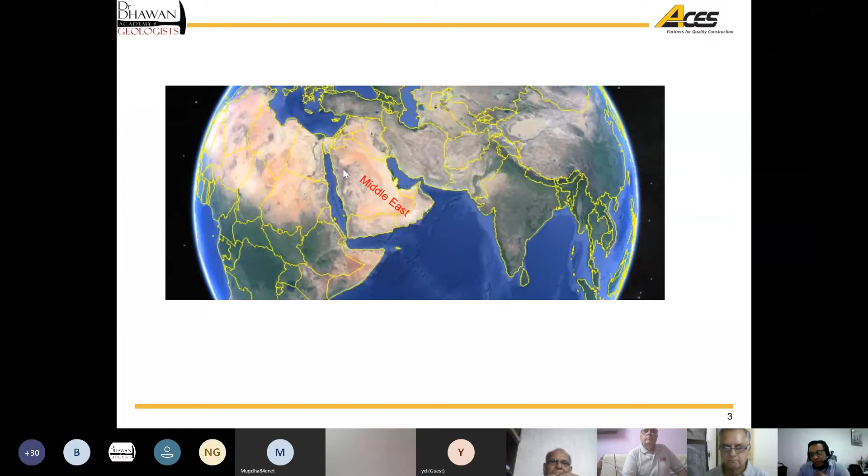So this is the Middle East part, this is our country India, and this is Emirates. In this part there are a lot of activities going on in present times, especially development of infrastructural facilities like roads, towers, buildings, ports, and airports. A huge activity is going on, especially in Saudi Arabia, with billions of dollars of projects going on now.

To have an overview of the geologic materials in the Middle East, which covers Saudi Arabia, Iran, Iraq, Syria, Kuwait, Bahrain, Qatar, United Arab Emirates, Oman, Yemen, and parts of Turkey: we have more dominantly unconsolidated materials, soils of the quaternary age. The rocks are deep-seated, below about 8 to 10 meters in this part of the world. Some exposures are there, like in the form of hills, hill ranges, and mountains. In general, in the plains, you get rocks at a depth of 2 to 3 meters to 10 or 11 meters, and above that you mostly get unconsolidated materials.

Underlying the unconsolidated materials, you get intermediate geomaterial, that is the weathered rocks, a highly destructured profile that is very distinct. At times, buildings or construction activity have to deal with this intermediate geomaterial, and for deep basement excavations you have to stabilize the cut slopes. As a mandatory requirement, all slopes generated more than 3 meters have to be properly analyzed before they get approval for construction. Below that, when we have deeper excavation of 10 to 12 meters, or in hill roads, any construction at the foot of hills, you get more than 8 to 10 meter cut slopes.

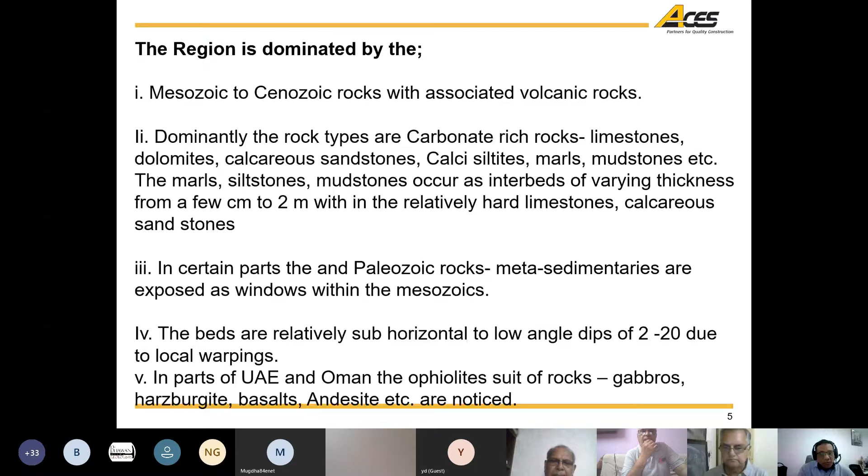So a whole range of rocks are there, but mostly for the slope stabilities, we get involved with the rocks like the limestones, the ophiolites, because they are in the hill ranges. For cutting or tunneling, you have to cross or cut across the mountains. So you have got at places very high slopes, cut slopes of 45 to 50 meters height for laying the infrastructure roads or tunnels in the tunnel portals.

The rocks are very jointed, highly jointed. In many places, more than 7 to 8 sets of joints you are getting. This poses extensive instability issues at times. If it's not properly studied and designed, the slopes, especially the slope angles vis-a-vis the protection measures, if they are not properly studied, they at times will land into problems.

This webinar presentation deals with the systematic approach followed in the study, effective design and construction of the cut slopes and estimation of cliffs in parts of the Middle East.

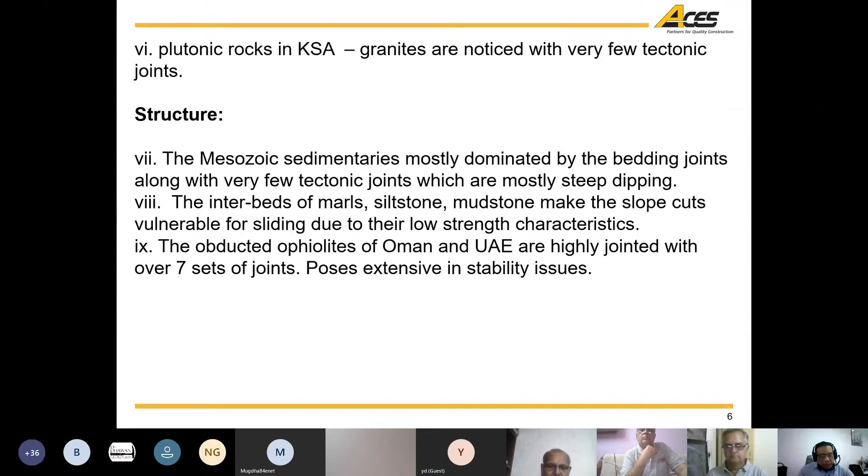In the Middle East, you have got very good number of deep or high cliffs, cliff faces where developments like construction of resorts, construction of hotels are contemplated or proposed or under construction. They mostly come to us to estimate the stability of these cliff faces, and what is the safe working line from the edge of the cliff for constructing the towers or hotels, any developmental activity for that matter, like roads also.

So we have to have a specific requirement here for the cliff faces. We've got a lot of cliffs here around the Middle East, like in UAE, Saudi Arabia, Oman. We have got good number of cliffs which are up to 700, 800 meter height, which are used as scenic spots, and they develop resorts on the top of these cliffs there.

We'll come to one case studies. The approach has to be very systematic, and if you are systematic in the approach, you are remarkably cost effective, and with high confidence on the long-term safety of the structures as well. So that's why a systematic study of the cut slopes or the cliffs is necessary before you embark on any detailed designs for the structures sitting over the cliffs or slopes, or the slopes by itself.

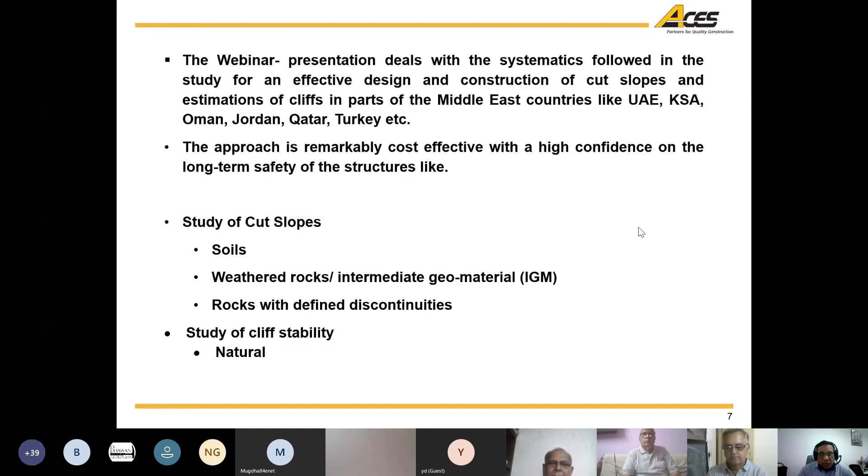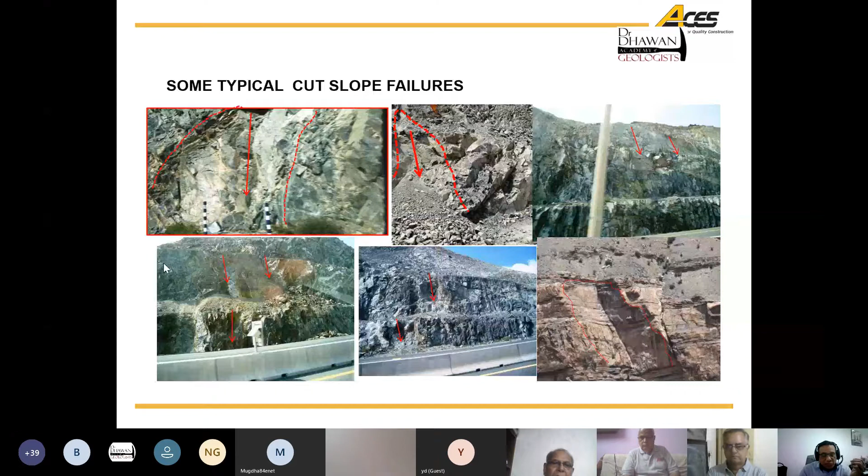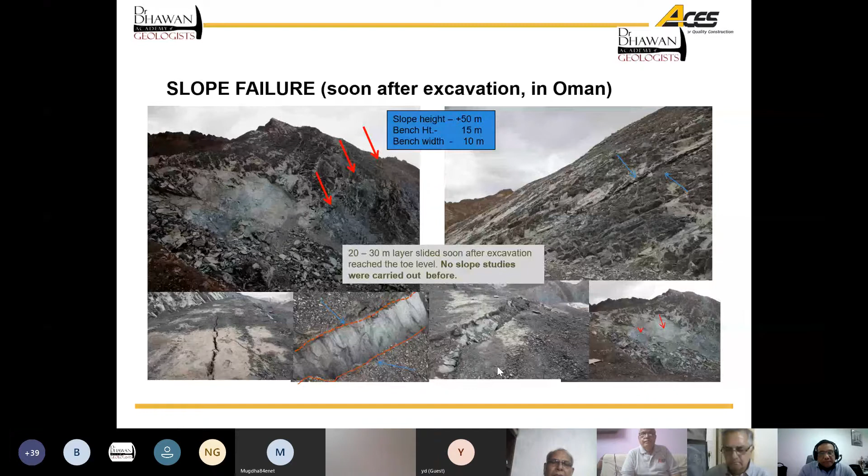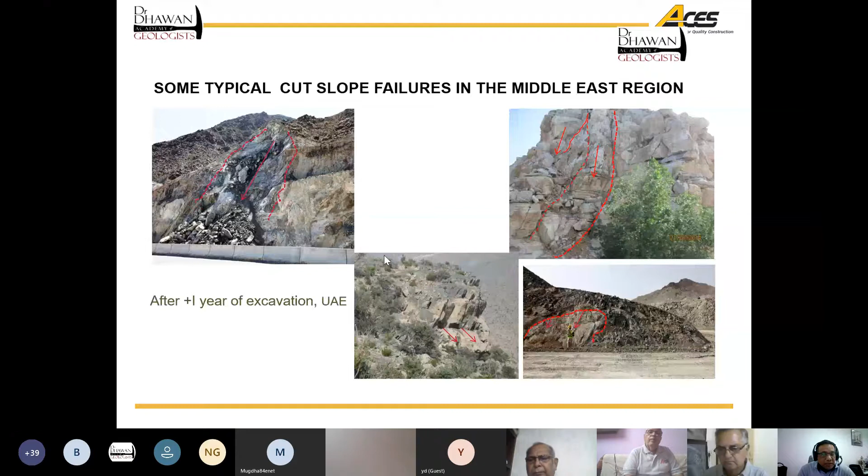These are some typical cut slope failures in the Middle East region. You see the natural cliffs falling with rock falls, and these are typical toppling failures which occurred soon after, within one year of excavation, because such failures happen if they are not properly studied. Here the bench has a concrete berm, but below the concrete everything has failed. You see this concrete slab is overhanging, this was a sealing on the bench, but it all failed. So for all practical purposes, this whole slope has failed in a way.

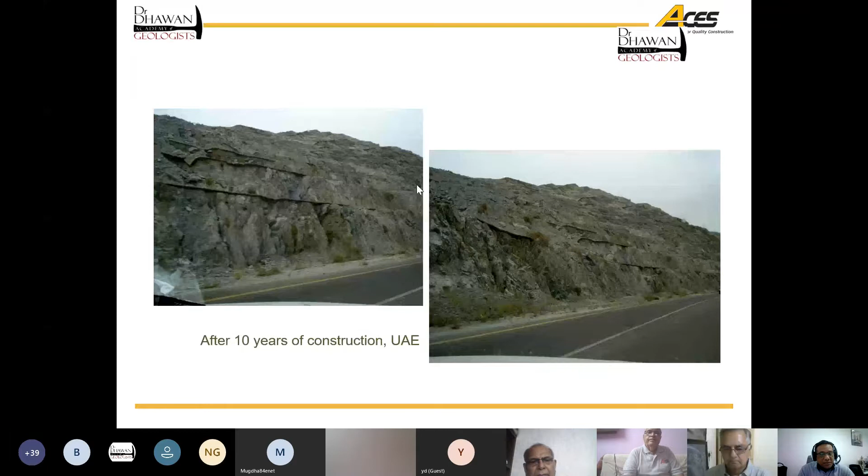So the engineered slopes mostly are the embankments, cut slopes, or retaining walls. Embankments are mostly in cohesionless soils, so we have to, in the weathered rocks, have a proper assessment of the material and design a proper slope angle for the excavations. This is very common in most projects, in the fields or in the weathered profiles or in the topsoils, where the slopes are anything more than 3 meters.

That's why it is a mandatory requirement from the authorities to approve the designs. Whatever excavations exceed 3 meters, it's mandatory to have a slope stability analysis. So every project with more than 3 meters of excavation has to be assessed properly, and the slopes, whether temporary or permanent, have to be designed properly. That requires a mandatory study for these cut slopes.

So the factors contributing to slope failures are mainly the composition, structure, secondary or inherited structures like faults or the joint system, then the stratification and the angle of stratification. All these are contributing factors for the stability of cut slopes. So we have to identify all these structural aspects within the rock material or rock formations, and we have to go for a stability analysis.

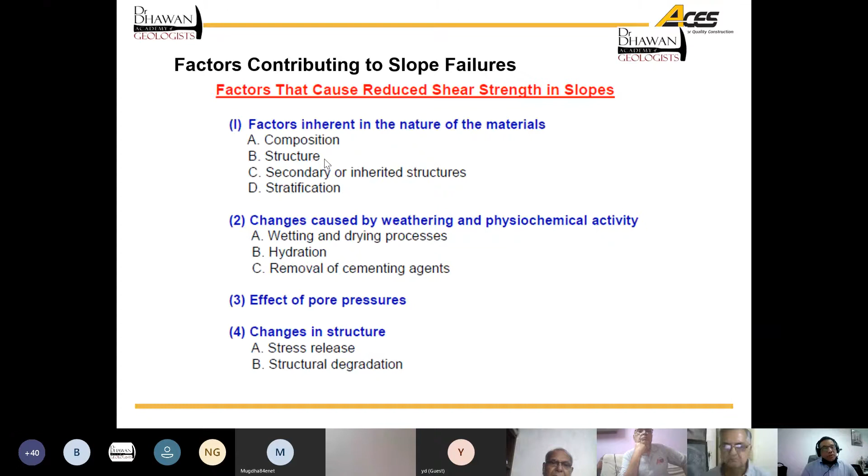These are the different parameters we assess, like the effect of pore pressure, dynamic stress conditions, the inherent structure of the material, and their rock mechanic properties. So we approach rock cut slope analysis within the rocks, and follow different techniques. We'll give you just an overview of that.

It involves systematic data acquisition from the field using the latest field techniques, like engineering geological mapping. We use satellite imageries or aerial photographs at times when the area is large, like for cliff studies where it is more than 5 or 10 kilometers in cliff length. We use high resolution satellite imagery to identify any major structures passing through, especially.

Then we do walkover surveys with engineering geological mapping and collect basic data like the joint system, different joint sets, bedding data, and azimuthal data of the structures. Then for the cliff faces, we adopt terrestrial photography for the cliff faces or cut slopes for a final estimation of the slopes with potential blocks, assessing the potential nature of the slopes, identifying and isolating zones, and providing site-specific treatment based on the terrestrial photo mosaics we develop.

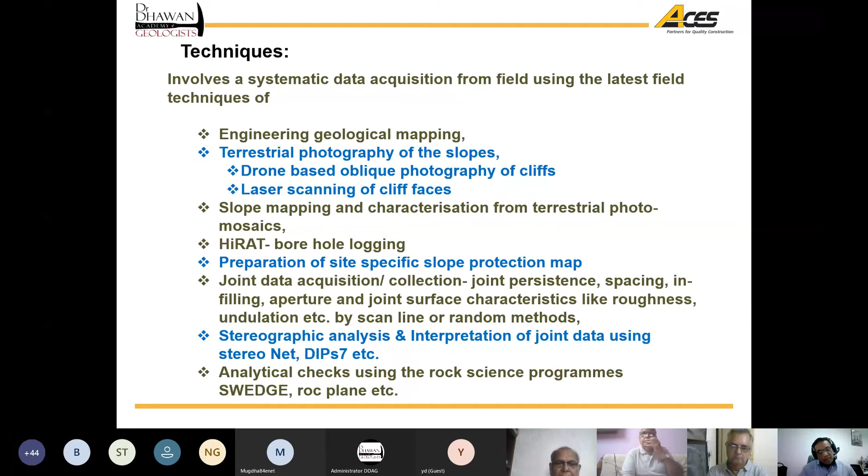Then based on the findings from the stereo analysis, we go for an analytical check using the rock science programs like Swedge, Rockplane, and we have Rockfall also to identify the site-specific problems.

The various equipment we use for slope stability studies are GPS, geologic compass, of course, high-resolution SLR cameras, selective for terrestrial photography, laser scanners, drone-mounted cameras, drilling equipment with accessories, HIRAT equipment for photography, borehole photography, and then comb profilograph, joint roughness measurement, Schmidt hammer for joint strength, tapes for linear measurements, and all that.

Then in the laboratory, we go in for testing, direct shear box tests to determine the shear strength parameters along the joints, along with fillings and without fillings, with asperities. Considering all that, we determine the shear strength parameters like C and phi along the joint for the stability analysis.

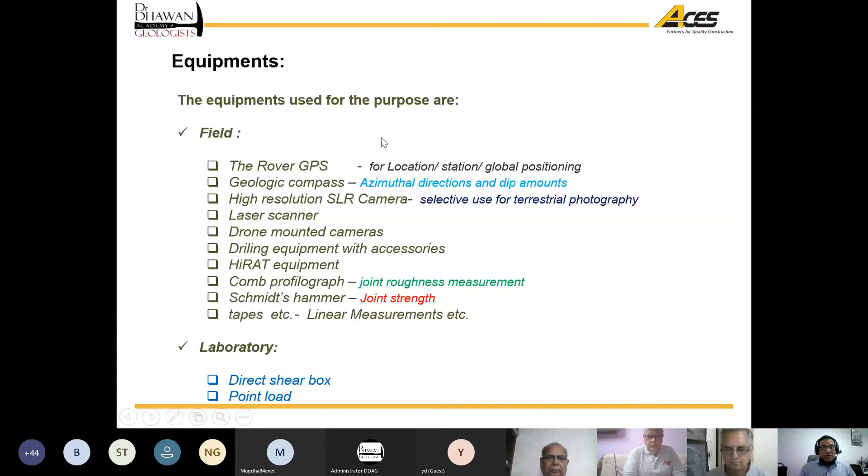Then we carry out point load tests for the strength, estimation of strength parameters, and density we estimate. Then the whole analysis revolves around the factor of safety which you have and what you have to achieve.

So there are two methods we use for factor of safety: the ASD method, that is allowable stress design method, and the other is load resistance factor design, LRFD method. In this ASD, mostly we check for a factor of safety of 1.5 in static condition and up to 1.1 in dynamic or earthquake condition.

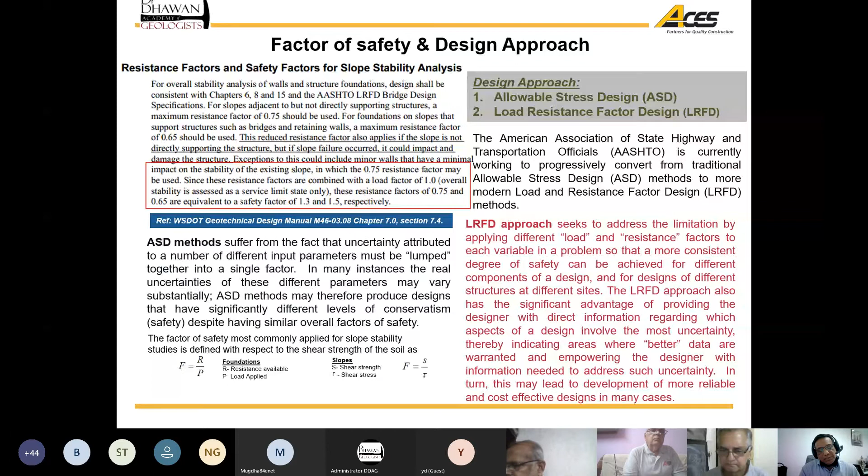The parameters for stability check and analysis, the various properties of rocks and joint sets which need to be determined or studied and used in the analysis, are the rock mass properties like density and strength, rock slope azimuthal directions, and the rock structure, discontinuity, and joint set characteristics. These are the different parameters we collect from the site as well as from the lab tests.

And we take the joint set characteristics like persistence, spacing, aperture, opening, filling. This gives you an idea of the block size which is formed or likely to be formed, and we can estimate, if it falls, what will be the size of the block and what will be its weight. All this you estimate from the analysis based on these parameters collected from the site.

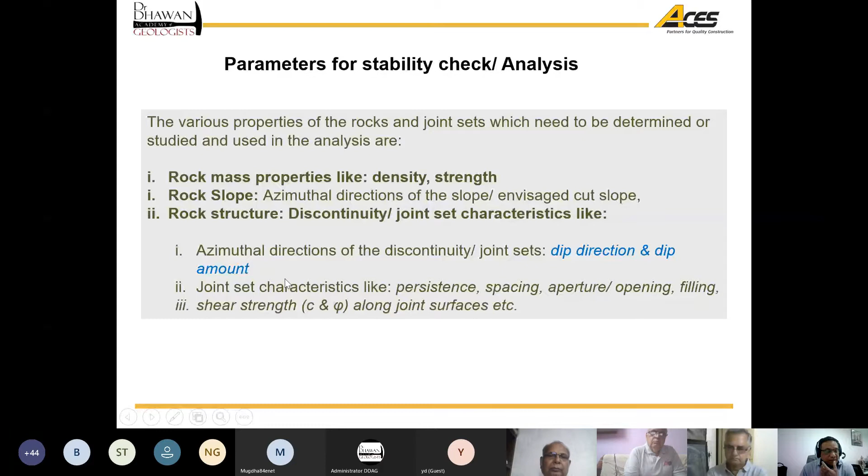So this is engineering geological mapping we normally carry out. This is just an overview. We use rover GPS here, we use compass, and we physically measure the data on that. Then the different data we collect during the course of this mapping include joint spacing, persistence, aperture, filling, roughness.

Joint compressive strength, of course, we get it from the lab, or we do Schmidt's hammer. Using Schmidt's hammer, we get the direct strength from the field.

Besides that, we measure the rock quality designation RQD, we estimate joint volume, then weathering grade, we note observation. For rock mass, we use the engineering classification of weathering grades to classify or describe the weathering of the rock mass.

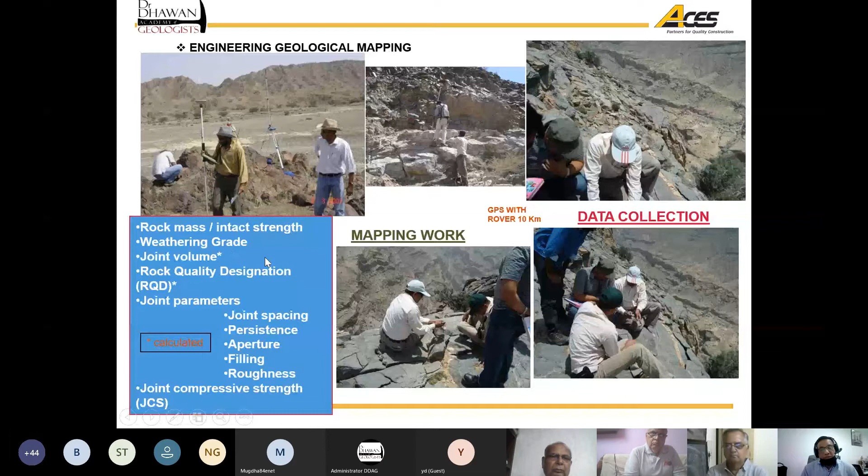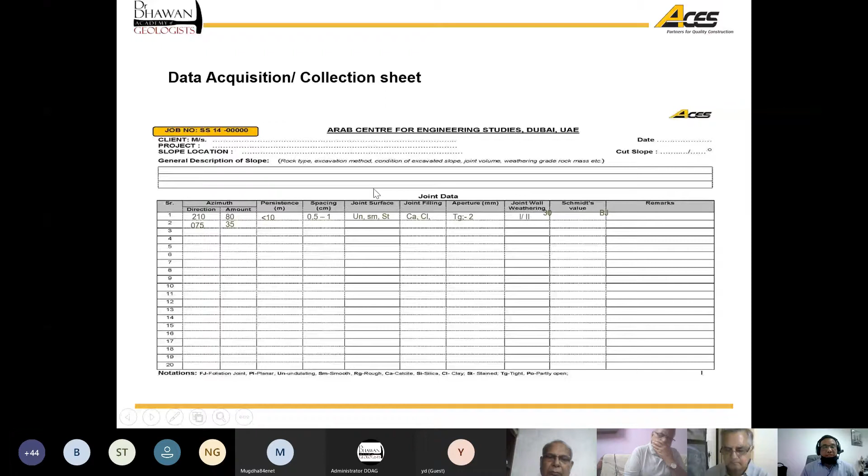Then we do the specialized laboratory testing. From the core, we select the joints and prepare the blocks. Then we take photographs, we measure the asperities and the directions. Then we mount it on the mold here.

This is the direct shear machine, and we shear it and determine the C and phi. Then we take photographs of the sheared surfaces after failure, for recording and reporting purposes.

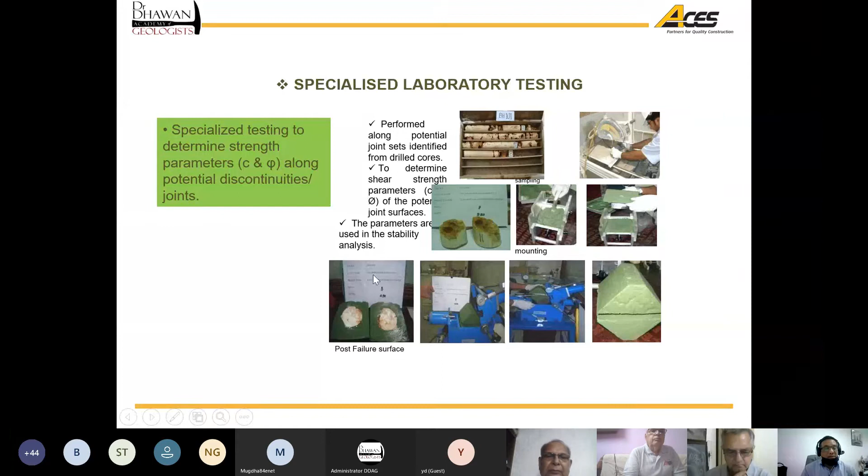For rock mass rating, we use SMR, RMR, GSI. These are different standard classifications we use for describing or characterizing the rock masses. For slopes, normally we use RMR and SMR to characterize and describe them.

I'm not going into the details of each classification. I have little time on that.

Just the personnel and software which we use. The personnel involved in such studies include a highly experienced engineering geologist, civil geotechnical engineers, geophysicists we use at times to determine the HiRAT. Normally the geophysicist handles it. Then a material engineer for lab testing, then a geologist for the field mapping.

Then we have a surveyor for using and handling the GPS. Then we have technicians for testing. Specialist software which we use includes AutoCAD, StereoNet, DIPS, RockPlane, SWedge, photo managers for processing the terrestrial photographs, and then we use RocFall. We also use Flac3D for 3D analysis.

So this is just an overview of rock slope mapping with terrestrial photomosaic. This is the principle - what is the base distance ratio? Based on that, we fix the overlap and take the photographs. This is the standard chart we use based on the focal length.

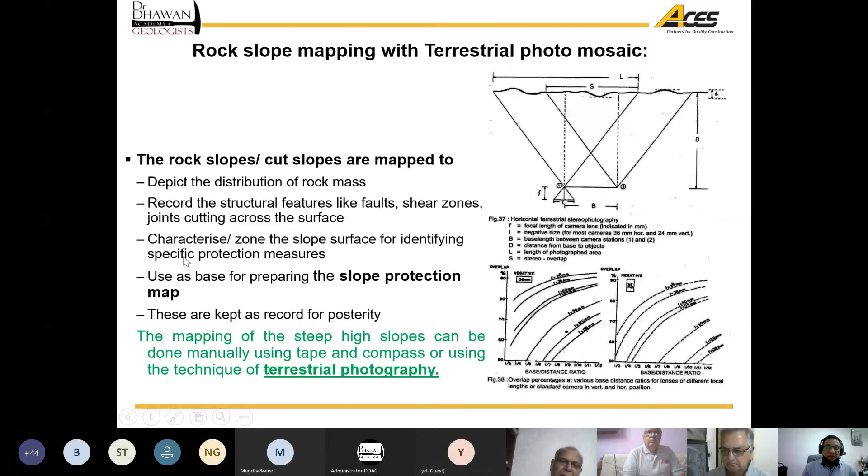People were proposing, contemplating at that time to use helicopters to map this cliff face. However, we came in, this was in 2004-5, and we undertook this job. We had to trek a lot, climbing up about 1 kilometer, almost 900 meters up, and at a distance of about 2 kilometers we took these photographs and could determine the features.

On the stability of this cliff, with any overhangs or any potential wedges or anything of that sort, we can identify from these photographs. In this particular project, after 2004, they came again in 2019 for a review of the cliff faces. We took repeat terrestrial photography and compared the previous and the present - a lot of rock falls, because it's a retreating cliff, were identified.

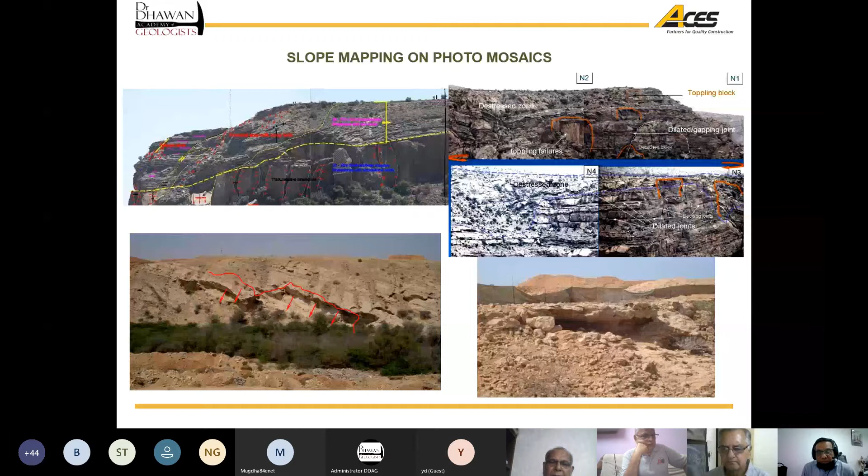So this is some precision drilling we do at times for the HiRAT study, as well as to study the joint surface data. We measure the varying dips and the asperities, undulations at depth. Suppose our depth of excavation is more than 50 meters or 40 meters - beforehand, you can find out the type of structure, the nature of structures, or the properties of the joint surfaces, all beforehand for a proper design.

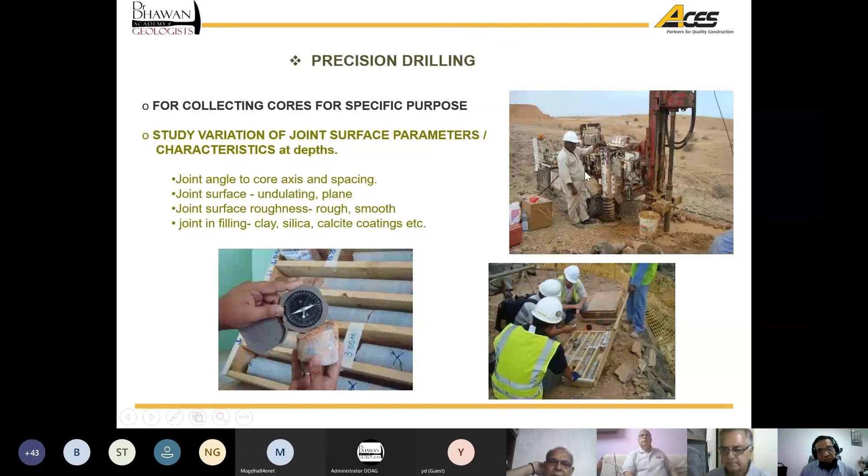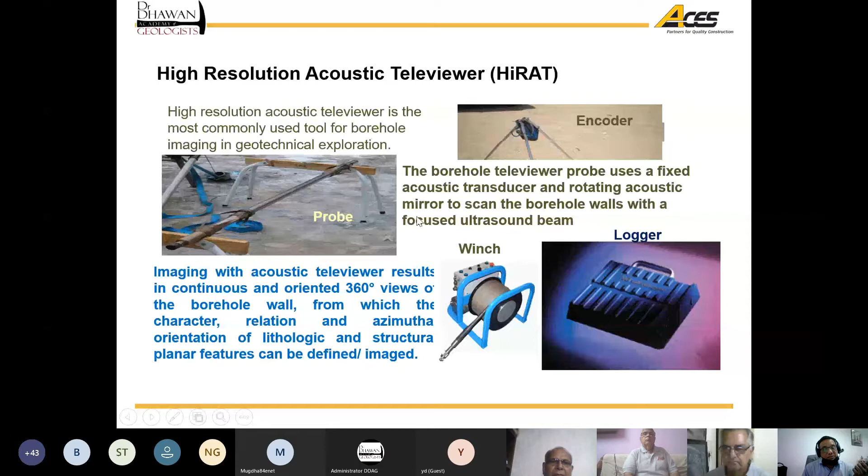So this is the higher resolution acoustic televiewer we use in the boreholes to determine or estimate the joint system. These are the HiRAT equipment features, and this is the analysis and interpretation we do. We get the polar diagrams, we get the rosettes. Then for this box particularly we have the recoveries, and you do the HiRAT output showing these different joints.

We compare it with the actual recoveries of cores and the joints just for confirmation.

You can use this data - like you got shear seams at a depth of say 12 meters, 15 meters, and another shear seam at this depth. These are the beddings - if it's horizontal, we get the beddings or bedding shears also at times. So you can identify the weak features at depth before you go into excavation, and estimate the potential nature of these seams and weak features with respect to the cut slopes.

And there is specialized laboratory testing we have done.

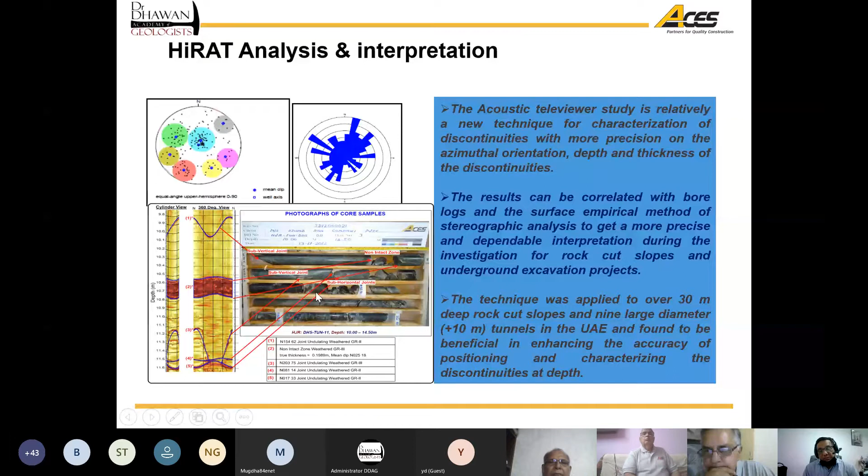Then we come to data analysis - the empirical method and analytical method follow. The empirical method is stereo plotting or kinematic admissibility checks, by which we identify the failure modes - wedges, planar failures, or toppling failures. We identify the specific wedges for which analytical checks are to be carried out, and we identify the azimuthal directions of the different joint sets contributing to instability from this empirical method.

Am I okay? Continuing okay? Hello? Yes sir, yes sir. Yeah, just cross check.

Now come to the analytical methods. As I said, in the empirical method we identify the different failure modes using the joint system, stereo plotting, or kinematic admissibility checks, using Rocscience softwares.

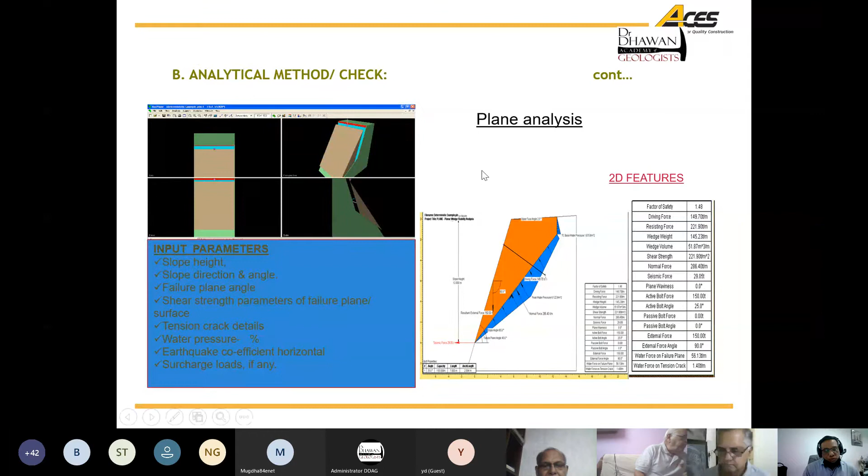So these are the analyses we do. We also do sensitivity analysis at times for critical or large projects, to see which parameter is more sensitive to stability and factor of safety - like cohesion, angle of internal friction, unit weight, or seismic coefficient condition. Accordingly, the support measures are designed, stressing more on the support according to the support designs.

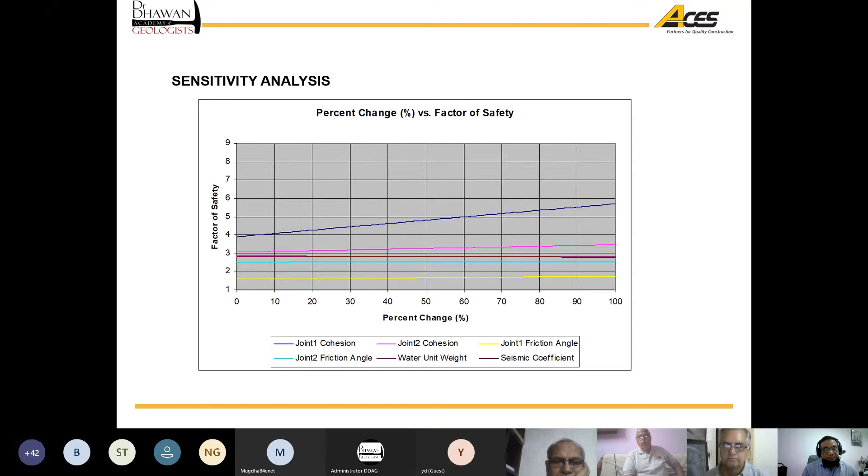So with this, we check for each block - wedge block or planar block - and then design or recommend the support measure required. We identified this site specifically on the protection map.

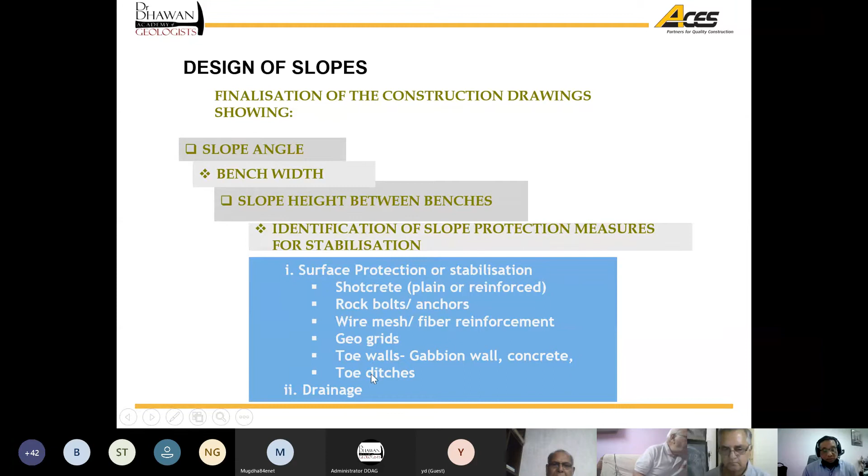Then the solution measures involve slope angle, bench width, slope height between benches - finalizing the construction drawings showing these parameters, and identification of slope protection measures for stabilization based on the analysis, like shotcrete, rock bolt, wire mesh, geogrids, toe walls, gabions, concrete toe walls, toe ditches, and drainage.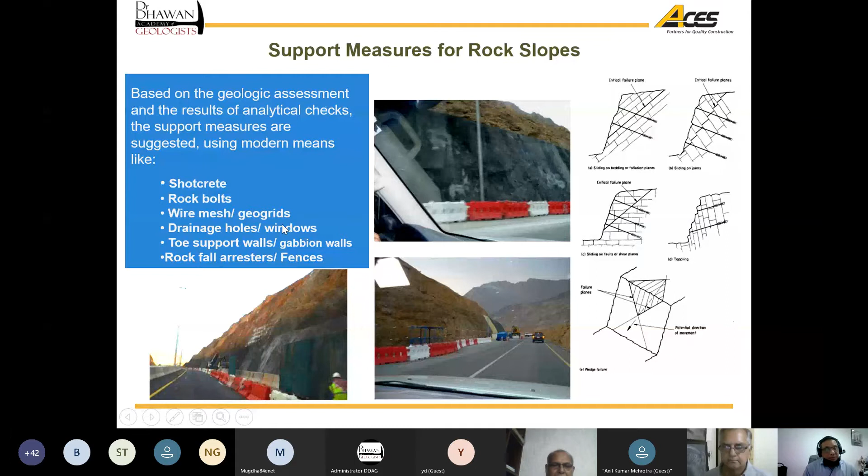Thanks. So these are some typical manually prepared slope protection maps. Then we do characterization or zoning, like high strength rock, high strength medium spaced, highly weathered, or slightly weathered.

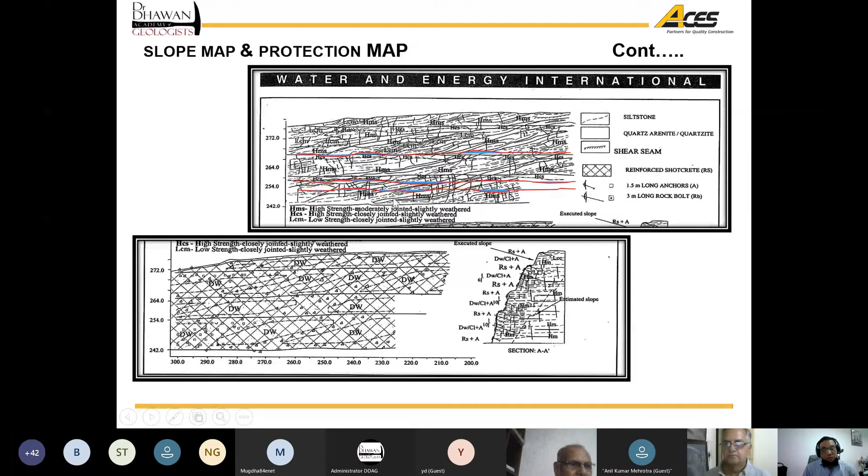We identify and categorize the slopes, and based on this we give protection measures - like only shotcrete, with bolts or without bolts, or only shotcrete with mesh reinforcement or without mesh reinforcement. At times we handle with the slope angle as well.

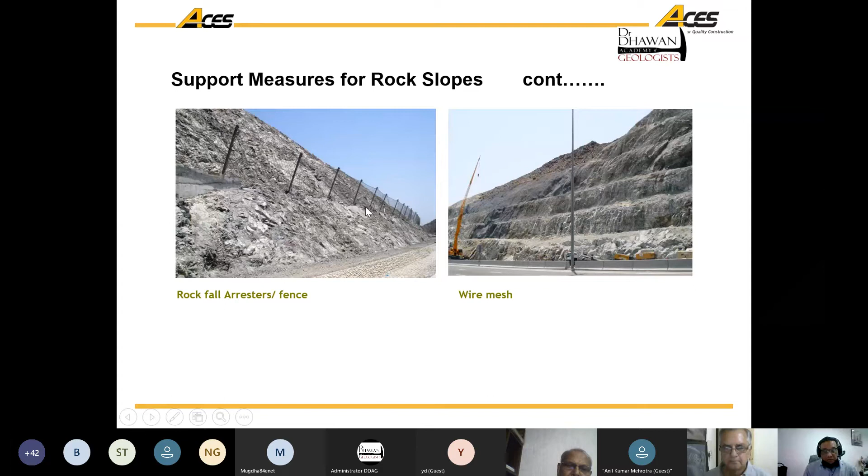And we give rockfall protection fences like this also, depending on site specific studies. These are site specific - the whole slope is mapped, and based on that we recommended only shotcrete on this part, with some rock bolts identified at potential blocks.

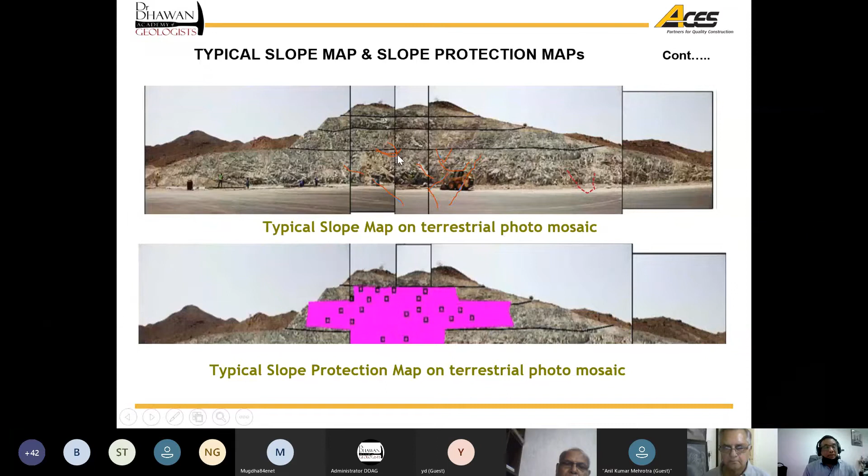We had to check the stability of this cut slope with the loadings of the water as well as the building loads. So we did the usual geological mapping, then slope stability checks, and had to design the support measures as well.

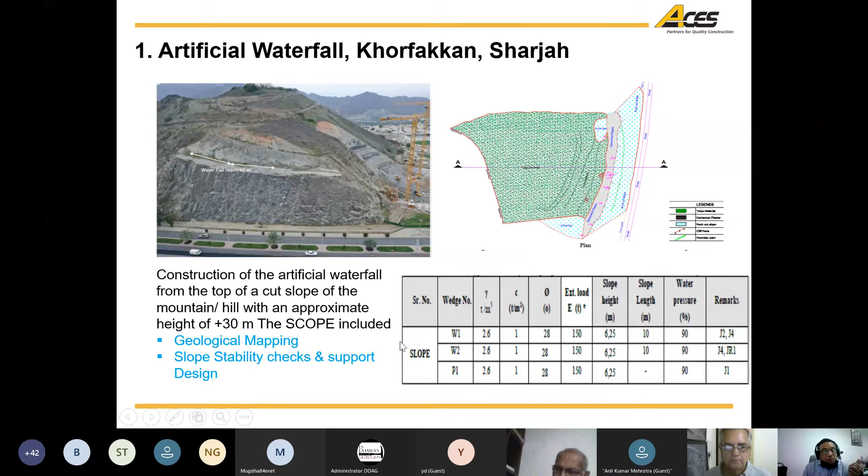Based on the geological mapping and lab tests, we identified a weak seam dipping at 32 degrees onto the slope, and we checked the stability of this block on the top, about 8 meters from the top of the slope.

So this block, the wedge block, they checked the stability with the loadings on the structure. We identified that it was not meeting the stability requirements. So we had to introduce a rock support system, rock bolts of 5 to 6 meter length with normal tensioning up to 30 tons, 30 to 35 tons. This is the identified summary table of rock bolts.

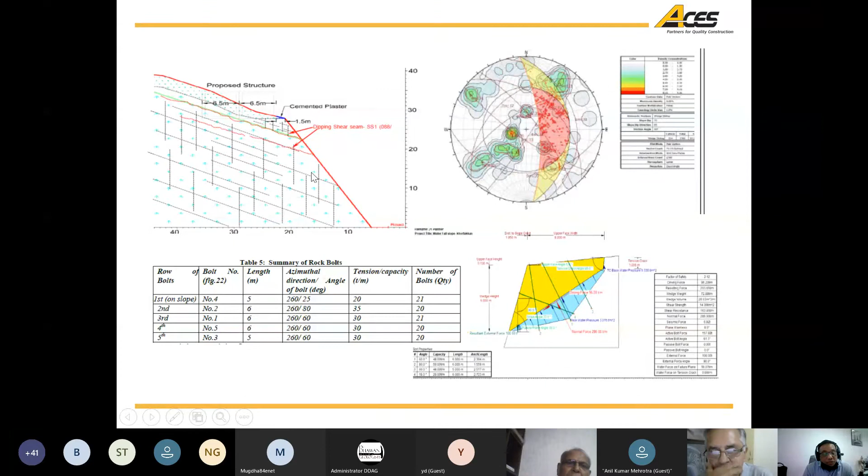This was executed at site, and the structure was constructed and is functional now. This is a restaurant here. The water is to be pumped from the top, creating a fall and going into a pool, and then from here the water falls onto the slope. This is the face where we had to do rock bolting from the face itself. We had to deploy big cranes to install these rock bolts, 5 to 6 meters length. From the top crest we installed these bolts from the top. Only one row we had here.

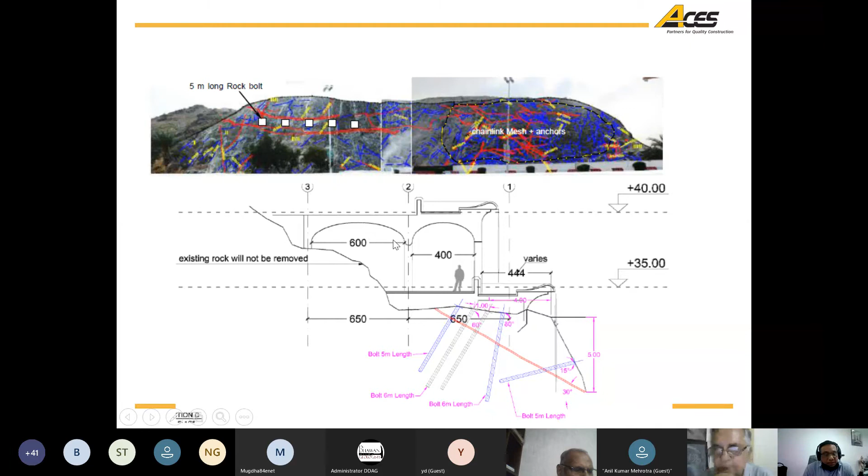This is the waterfall. In the night it looks like a scenic spot, very close to the sea beach, Khorfakkan beach in the Sharjah area. This was a very interesting project, we worked day and night. Now, over the last 6 months, this is functional.

Then we had the branded service apartment, Ava, in Saudi Arabia. We did one project where this is about a 60 meter high cliff cut. The slope was, this is during construction. Then we did the terrestrial photography, then identified the litho units and the structures. Based on that we designed the support system. This is the building, a hotel, a service apartment, branded hotel.

And the profile was something like this, a gently profile, hill profile. This was cut to this size, and the bench was created to construct the hotel. So this is the face log, or the photograph I have, and based on that we identified and characterized the rock masses, identified the litho units. This is the shear seam here.

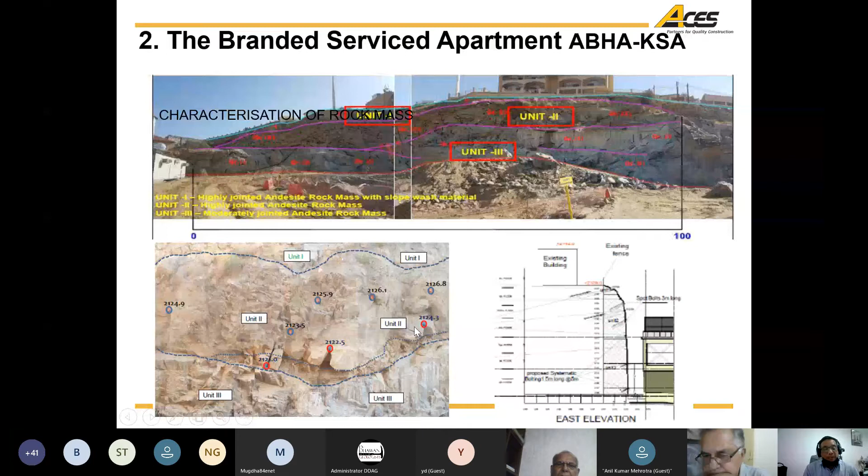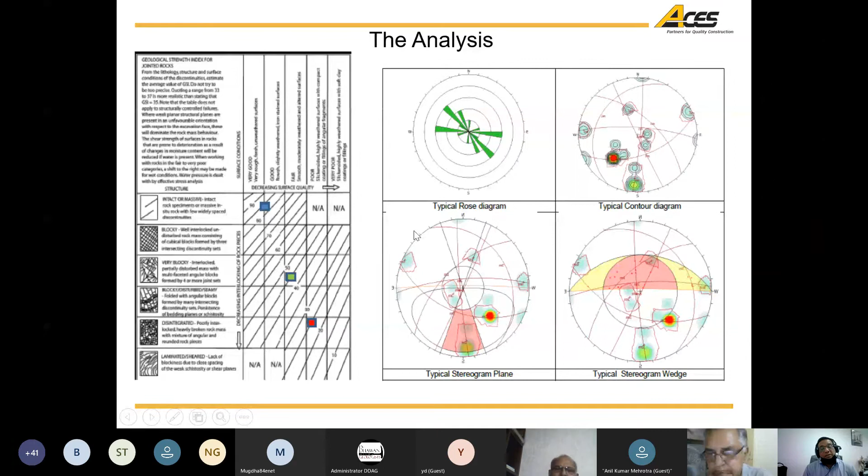We worked out a stability check for this and identified the support system. These are the different analyses we carried out - stereo plots, GSI estimations, and from that we found out the c-phi parameters. Then we did the stability analysis or stability checks, and identified the support requirement, considering the surcharge loads on the top.

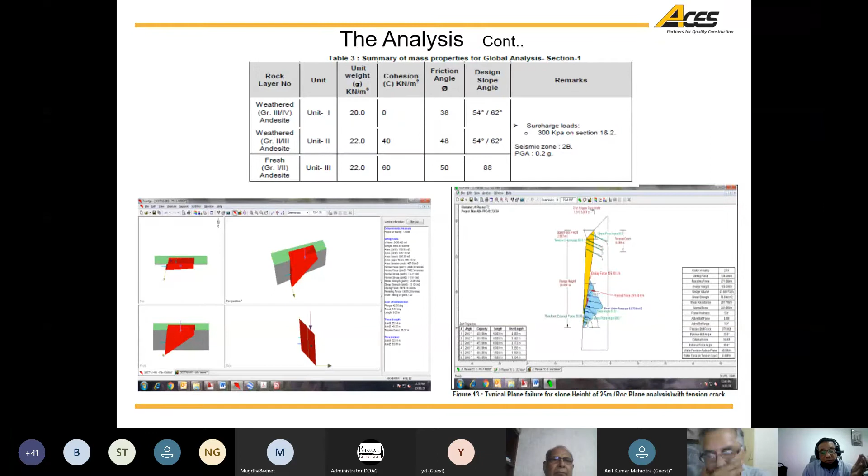So these are based on the study, the different recommendations given - rock bolts of different lengths at different elevations, because the gap between this building and the cut slope was very limited, only 4 to 5 meters. What happened - they did some estimations earlier, they put long bolts, that was done by us. Later the consultant went to another agency, and they carried out a review analysis and recommended 8 to 9 meter rock bolts throughout, from top to bottom.

By then the building was already constructed, so they had only 4 or 5 meters of space, and it was impossible to install 8 meter bolts in this region. So we did another review analysis later. We increased the tonnage capacities of the bolts, put larger diameter bolts here, and reduced the length of the bolts at the toe level, increasing the normal loading tension to achieve the factor of safety.

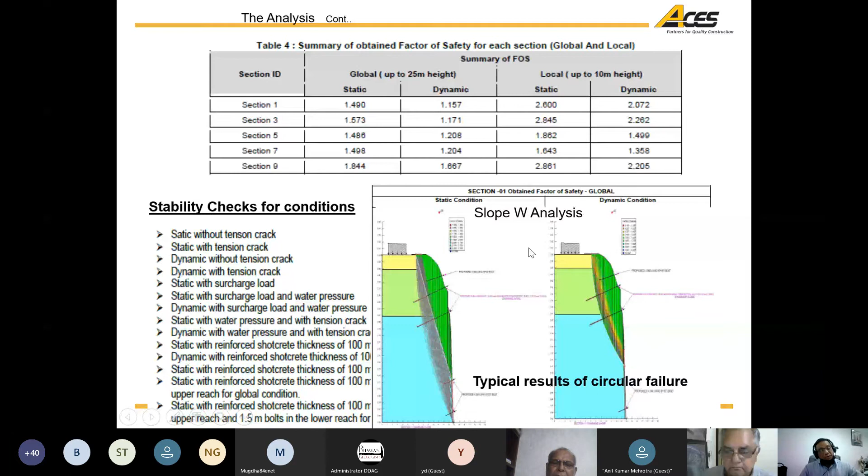We did the stability analysis for different conditions - static without tension crack, with tension crack, dynamic without tension crack. All these aspects were considered. For the different sections, this was about a 100 meter long slope, so we had about 9 sections evaluated for the stability check, and the support system was designed and is in position now. The hotel is completed, and so far so good, it's going on.

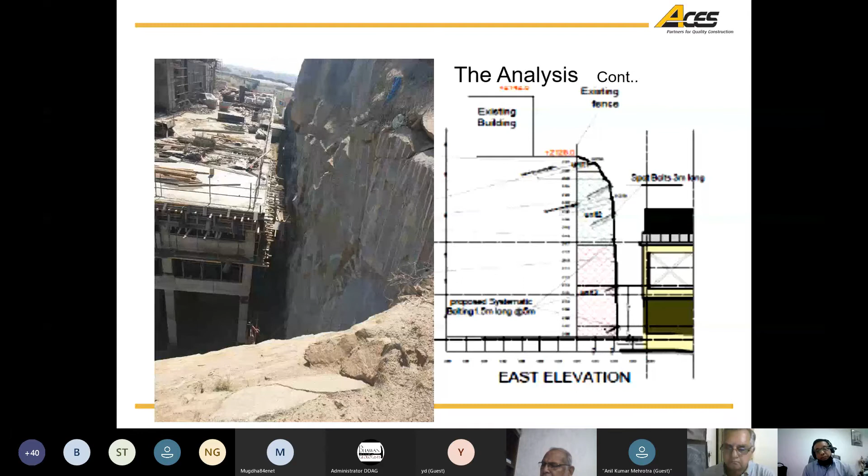The recommendations given are that we also mesh reinforcing existing systematic bolting. Then we changed and altered to 32 millimeter dia bolts. Earlier it was 26 mm only.

We also had to put some additional drainage boreholes here because there was a seam, which is potentially, of course, the dip of the seam was about 25 degrees. But with the normal loading, there was an existing building here already. Another building was coming here, has come here. For this, the whole slope was excavated to position this tower. So these are the different recommendations we give based on these studies.

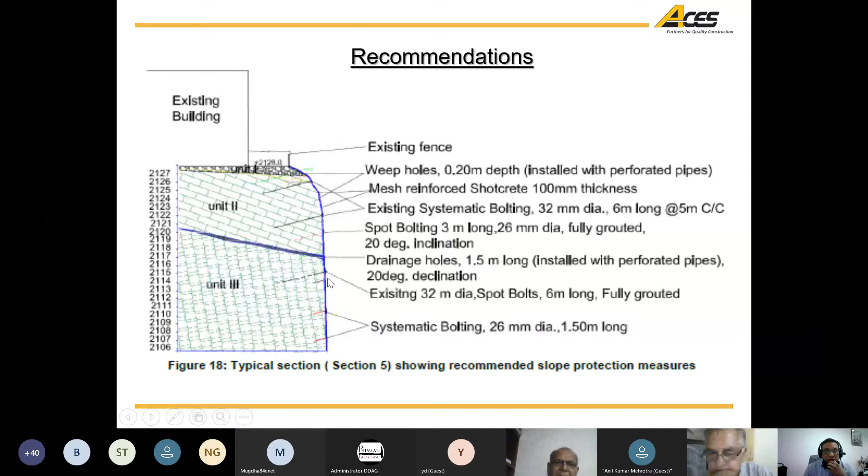Now we come to the cliffs, natural cliffs. We do geologic mapping, terrestrial photography, stability analysis. This cliff was about 800 meters high, in the Sultanate of Oman. Oman Tourism wanted to construct a resort hotel on top.

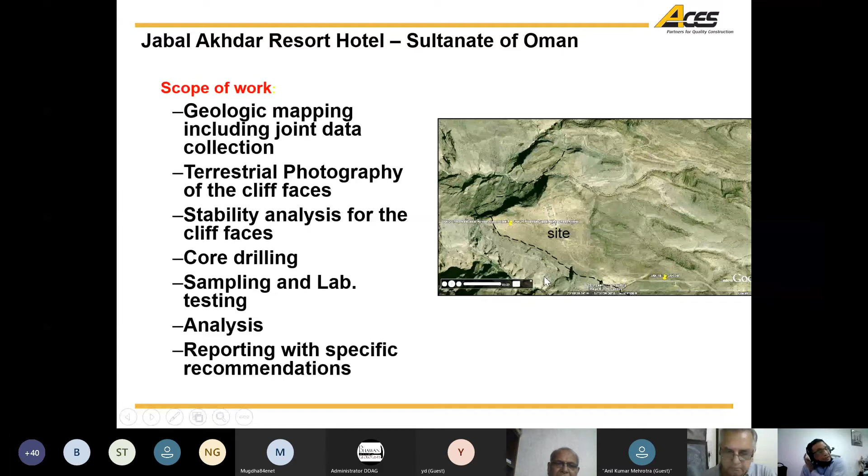This is the top, this is satellite imagery. All along this area, they have put resort hotels now. This study was carried out in 2004-05, and we had a review again in 2019. There were many rock falls here. So based on our previous study, we had given a safe working line, with different options provided. The methodology, as I told you, is very similar to the general study I described.

But the most interesting part was the terrestrial photography, carried out from a distance of 2 kilometers. That was very challenging, and we had to trek almost 900 meters on top, steep slopes. We went to the complementary top of the gorge section, and from the other side of the gorge we took the photograph, and it went very well.

This is the geological map of the top portion, and this is the cliff distress, highly distressed zone. Mostly these are limestones, and though it is subhorizontally bedded, the joints are distressed. The edges are very much distressed at the cliff face, and we had a lot of distressed rock mass all along this cliff.

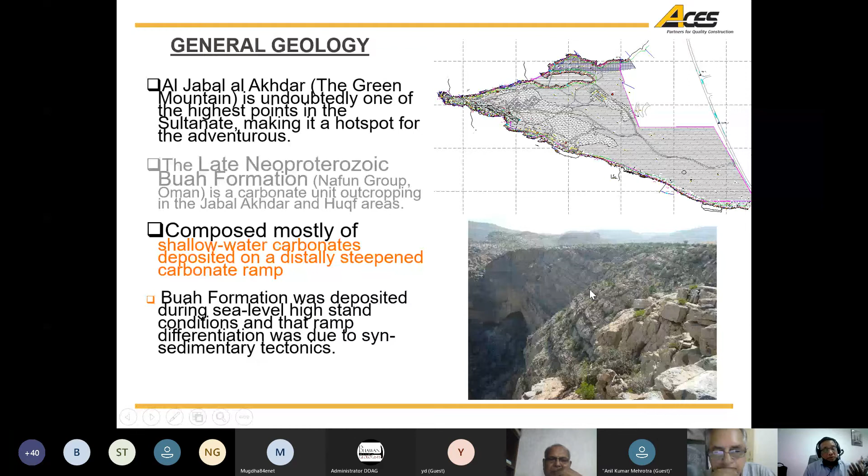Then we did the mapping, drilling, acoustic televiewer, and trenching, collecting all data for geological mapping, and then we did terrestrial photography. As I told you, this is the cliff section, the gorge section. From here we went to the complementary top on this side, and took photographs from those two points. This is the north slope and this is the south slope. This is how we did it.

This photography was really interesting, very challenging, because we had to convince a lot of people in the authorities as well as the consultants. So it took a lot of time, but we completed the job very successfully, and they were quite okay with this. These are the photographs taken from around 2 kilometer distance with high resolution cameras.

Ahmed sir, can we rush through now?

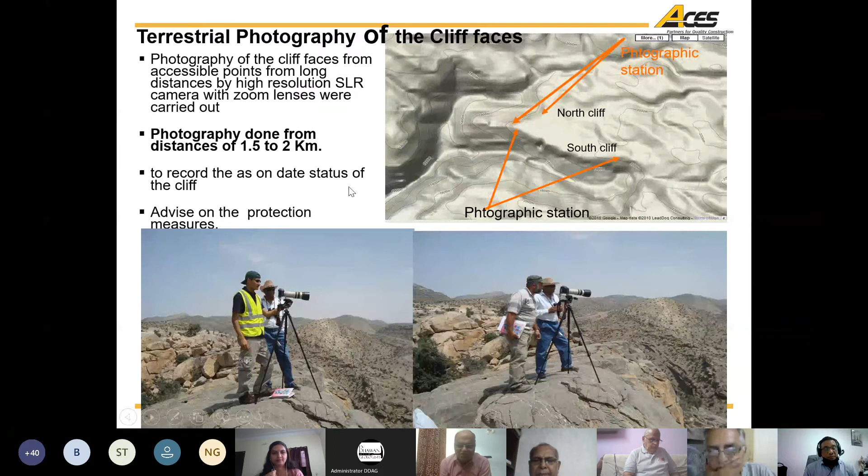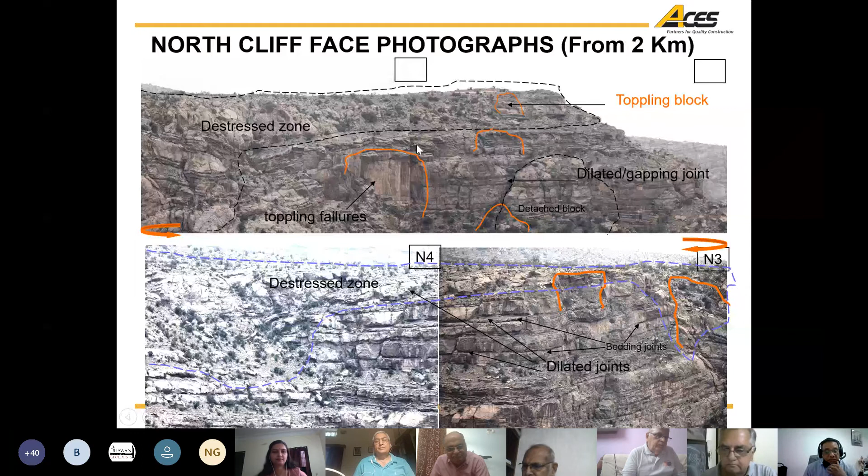Yeah, for different zoning we did stereo analysis for the different zones. Then we did direct shear tests, kinematic admissibility checks, and analytical checks as well. These show the different nature of the distress zones we identified. For different zones, we identified different wedge blocks, and we have the summary data of slope stability analysis and analytical checks.

This is the nature of the distress zone close to the edge of the cliff. Based on the study analysis and the nature and thickness of the distress zone, we fixed a safe working line at a distance of 5 to 6 meters from the cliff edge.

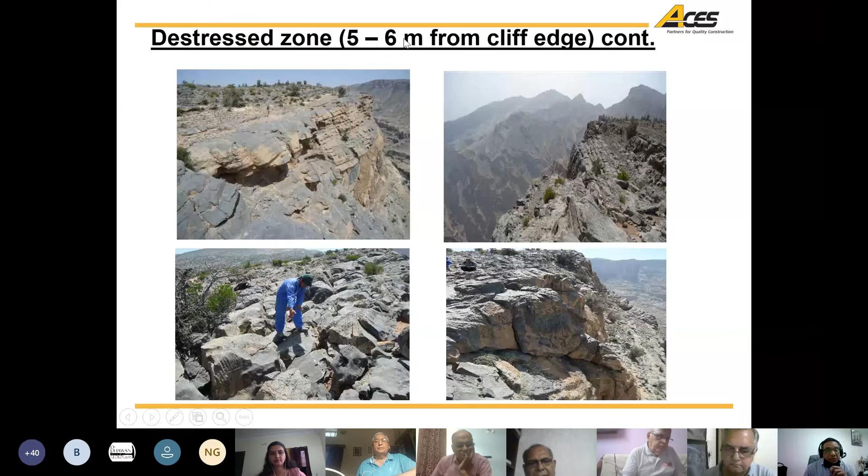So they gave different options. Without any protection measure, you need 8 to 10 meters from the edge. If you go for some protection measures, your edge can be about 5 to 6 meters. So we gave 2 to 3 different options and did the analysis with this.

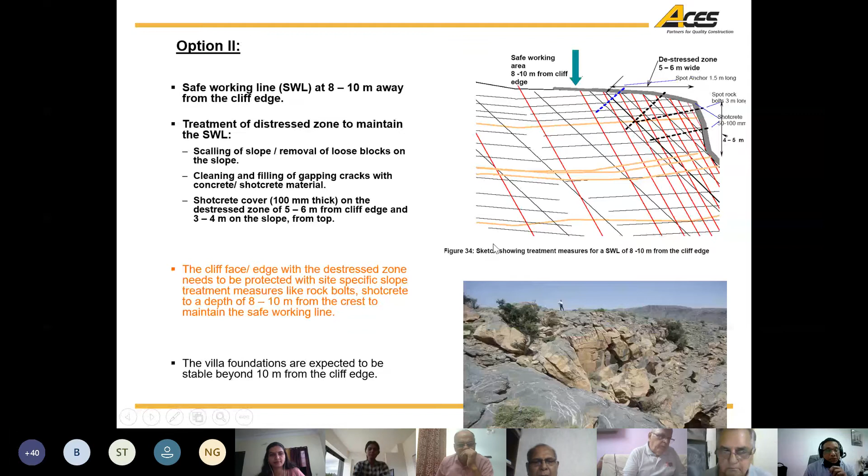And these are some typical models. You can see the structures which are likely to come for the different cliff faces here. These are the different structures to come, like resorts, 90-meter high hotels, water parks, racing tracks, shallow tunnels, and parkings. All this will come within this 17-kilometer cliff face. This is the satellite image.

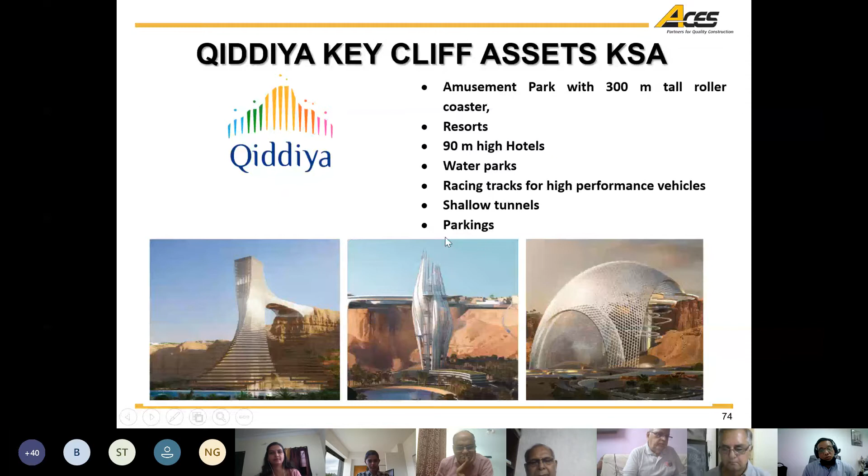This is the different base of the cliffs we have, 200 meters. We had to estimate the stability of these cliffs. We did a study on the cliff section, which is almost 17 kilometers, and took almost 43 sections across this to study the stability based on the structures proposed or locations proposed.

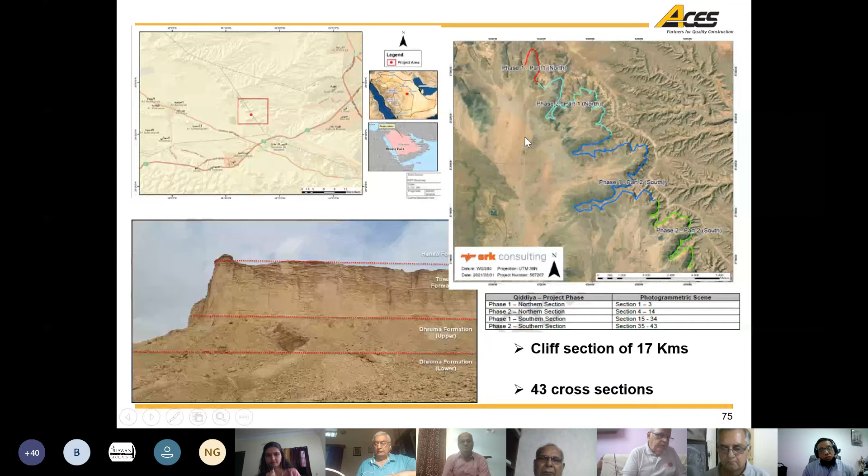The techniques we used are digital terrestrial photography, escarpment, geotechnical mapping, aerial photogrammetry models. Then we did drone surveys, drone oblique photography, and the point clouding method for the analysis.

Here we did the rockfall analysis and rock mass characterization. We did kinematic analysis, rockfall analysis, key block stability analysis, and FEM modeling to understand how the cliffs will behave with loading, with dynamic loading, because a roller coaster gives very dynamic loading. All these studies were done, and the softwares used are DIPS, Swedge, and RS2 for strain and displacements.

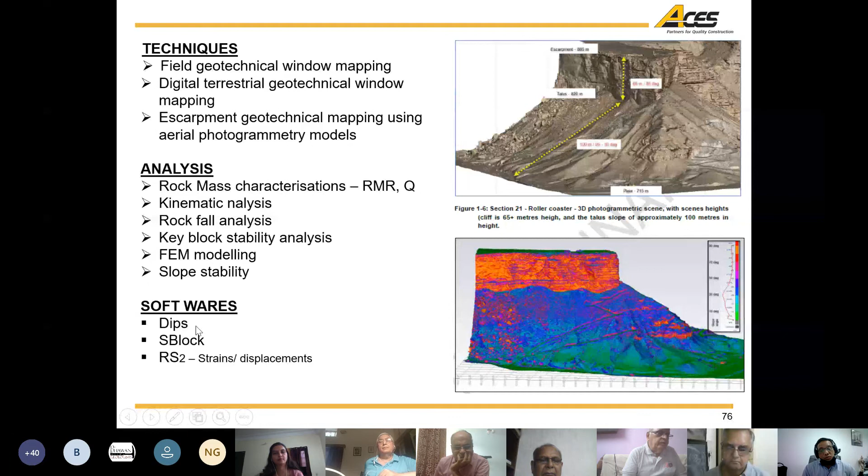This is the displacement without bolts, without any protection, showing how the cliffs will behave with loading, and what will be the order of displacement. These were identified with the RS2 study, Swedge study, and the rockfall analysis, giving heat maps, runout distances, energy, velocity, and bounce height provided to the designers. This gives an indication of the rockfall risk, and can be used to inform rockfall mitigation measures.

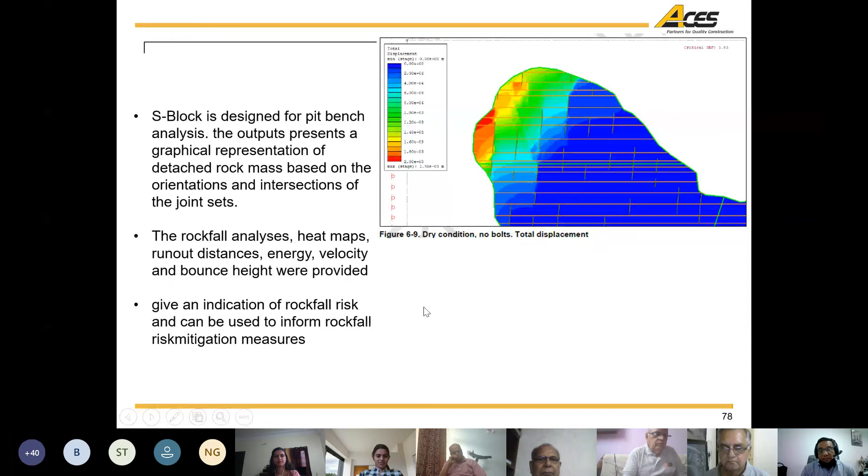The other project was in Saudi Arabia, the Darya Gate cliff face. We very recently did this project. Again, the same terrestrial photography, laboratory testing, walkover survey, and satellite imagery studies were all done. This is about 7 square kilometer area, and the cliff length is about 5 kilometers, with a height of 20 to 25 meters on the western side.

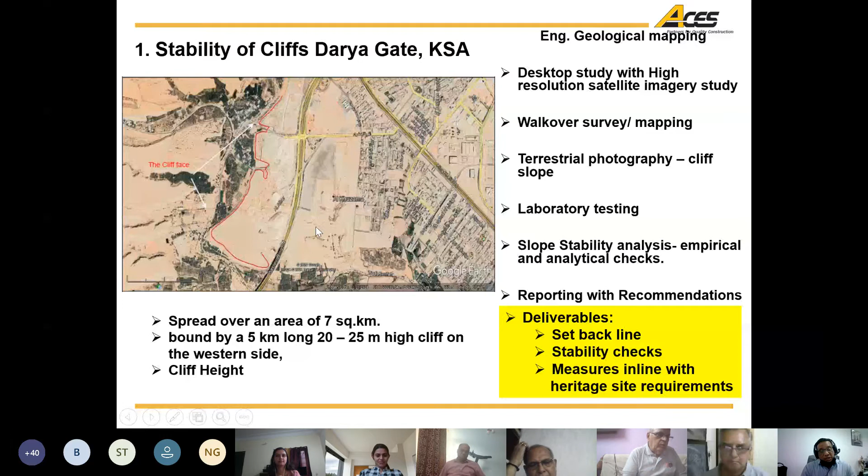This is the cliff all along this, and it is a national heritage site, so we had restrictions on the support measures we recommended. No shotcrete was to be used, no wire mesh, and no rock bolts either. So we had to propose synthetic transparent adhesive type polypropylene grouts to grout the cliffs, because the distress zone was about 2 to 3 meters, and we gave a safe working line of 3 to 5 meters from the edge of the cliff.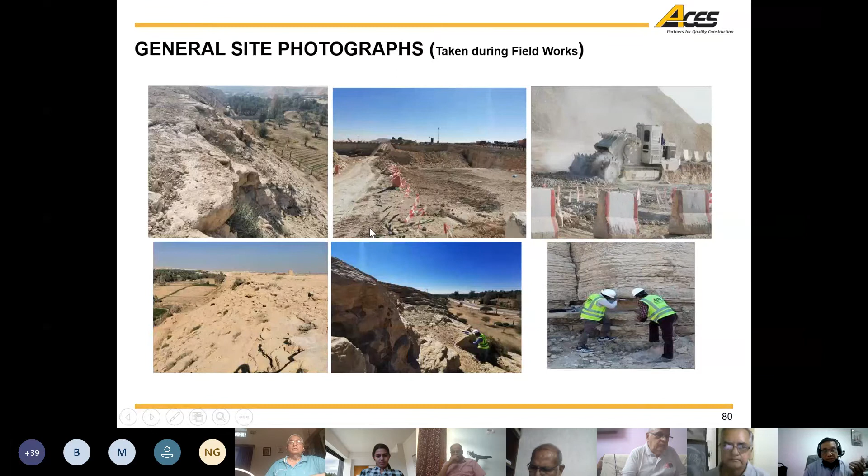These are different studies, some general photographs of the site. This is the geology we did based on satellite imagery studies. Then we did the site walkover survey, collecting joint data, and the Schmidt hammer test. Asperities were very important for this project, collected with comb profilographs. We used the Schmidt hammer for strength testing.

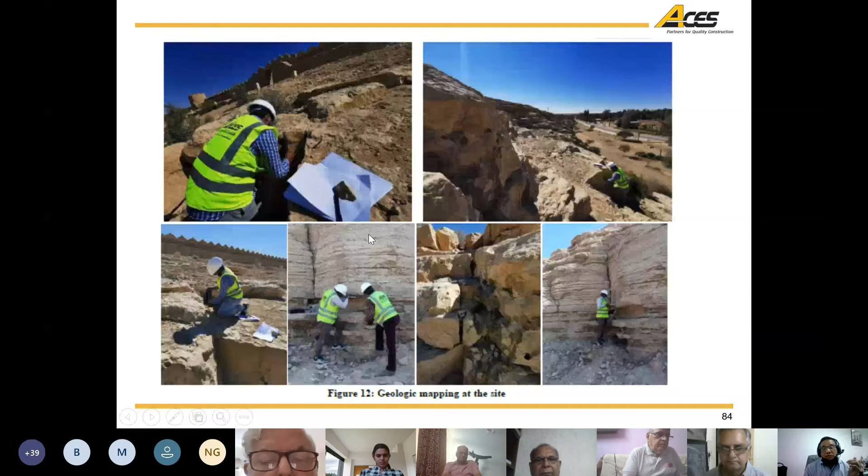So these are the different results. Then we identified the de-stressed zone. Here is the cliff, and this is the zone, about 2 to 3 meters from the edge of the cliff. This is the de-stressed zone where all these blocks have opened up, distressed all along.

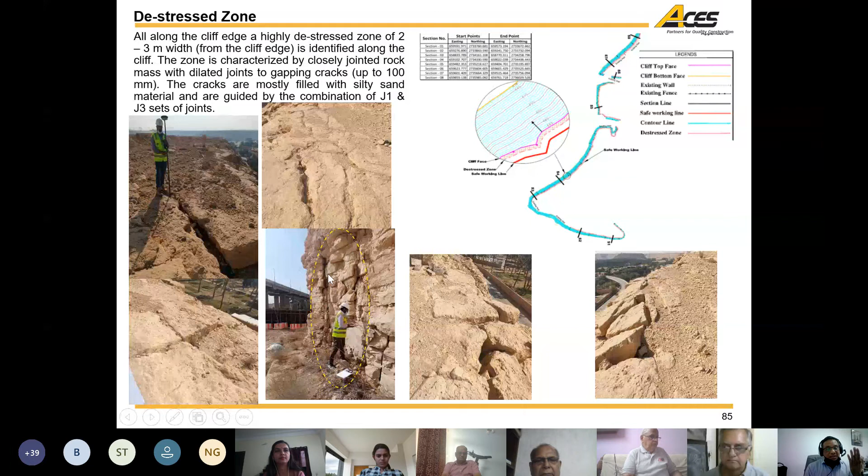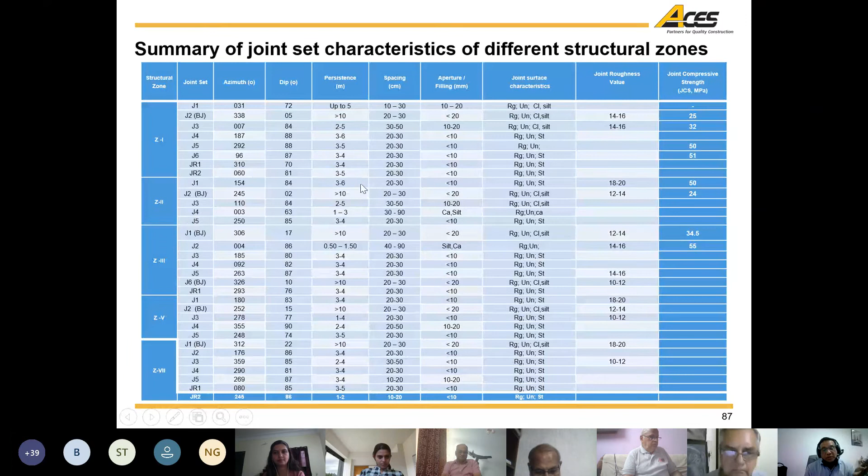So then we did the stereo plotting analysis as usual, identified the joint set characteristics for different zoning, done for each zone. We identified the potential failure modes and failure blocks, showing which joint system and joint set is involved for wedge 1 in zone 1, with the azimuthal directions for the wedge. This data was utilized in the analytical check.

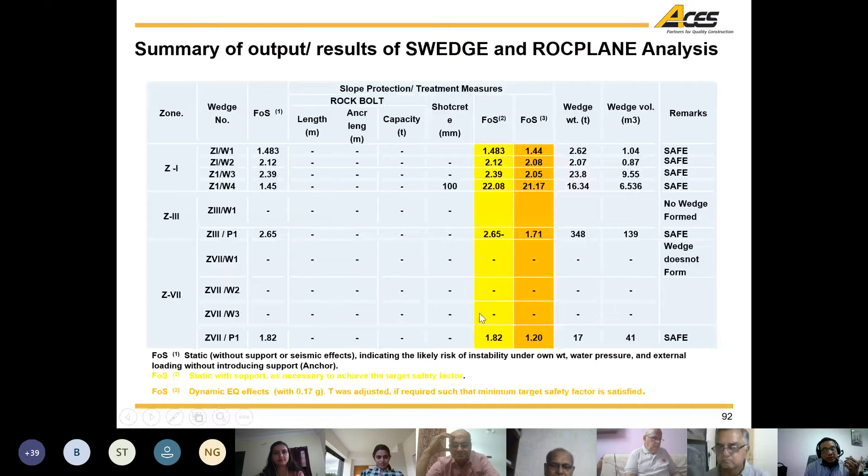Here is the input for the analytical check with this data, and these are the input parameters. Then we did the analytical check for wedge and planar line failure, with a summary of the factor of safety achieved. Mostly it is all safe, no wedge formed, because the slope angle here is about 50 to 55 degrees maximum, and the bedding joints are subhorizontal, about 2 to 5 degrees. So there was good stability of the cliff face identified.

With the surcharge loads, we went up to 35 to 36 tons of surcharge loading, estimated and checked for stability, analyzing over almost 8 sections along this cliff. Can we wrap up, please, now, Ahmed Saab?

Yeah, it's over. This is the stability work we have done. There were different sections, and these are the different protection maps we have given. There are a lot of caves and caverns here.

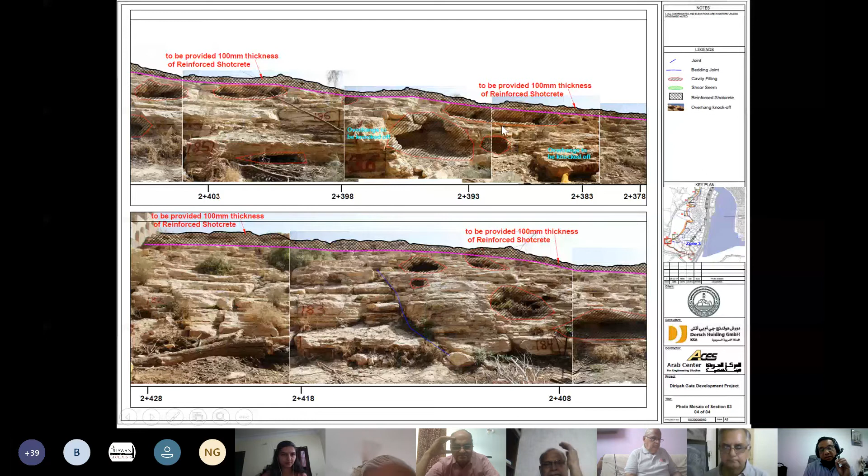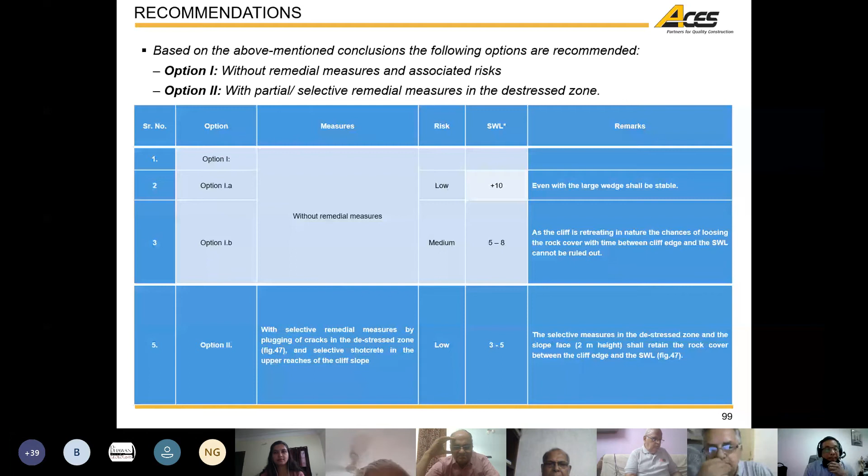We have used mostly synthetic products recommended for this stabilization, like synthetic grouts or synthetic sprays to stabilize. They don't want any alteration of the face. If the caves or solution cavities are there, it should remain as it is, natural, because it is a heritage site. No face alteration is wanted; it is to be very natural. So we use transparent synthetic grouts for sprays and grouting at the top. No rock bolts, no varnish.

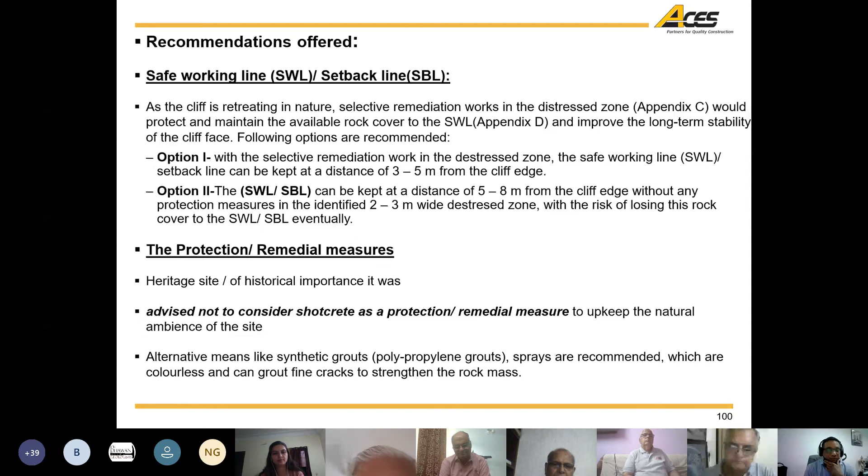Luckily, the site was quite okay from the stability point of view, so we could recommend all this. Otherwise, had there been a requirement of stabilization with rock bolts and all that, it would have been a different issue.

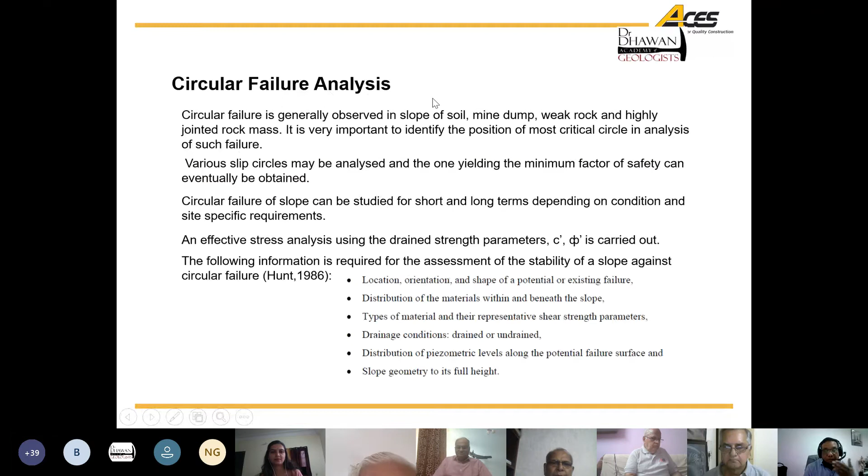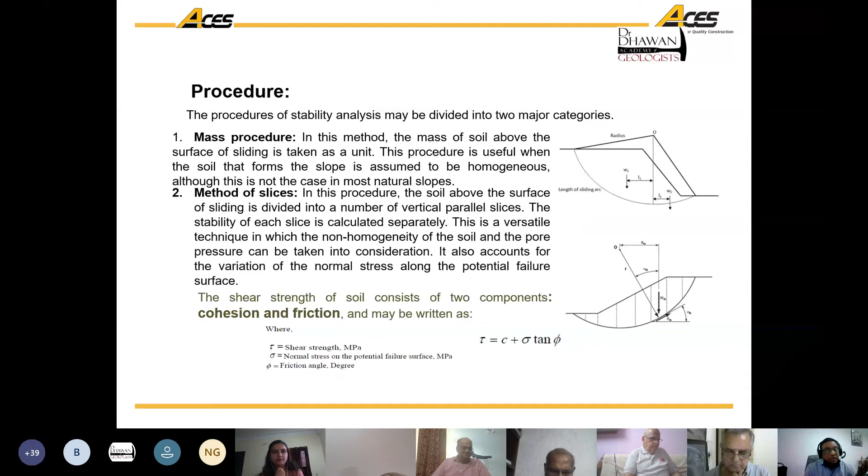So in the unconsolidated materials, like soils and weathered rock, we carry out stability analysis for circular failure. We collect mass sampling from the site, then do testing like direct shear, small shear box, or large shear box, depending on site requirement. We follow analytical methods straight away, no empirical method here.

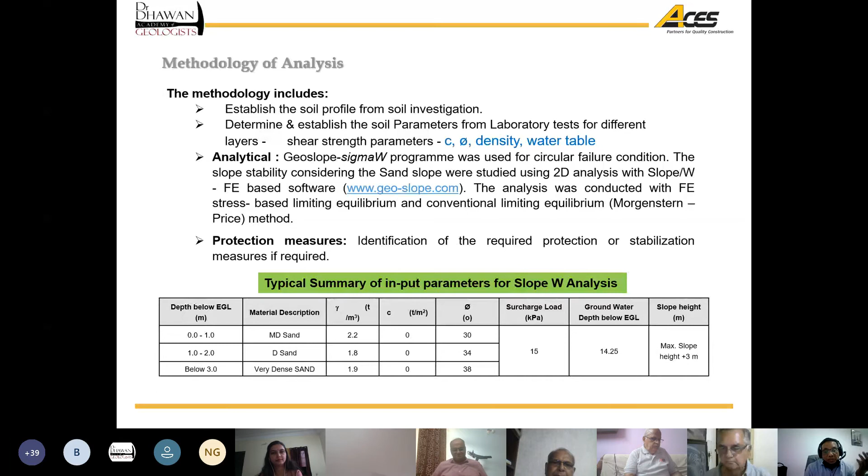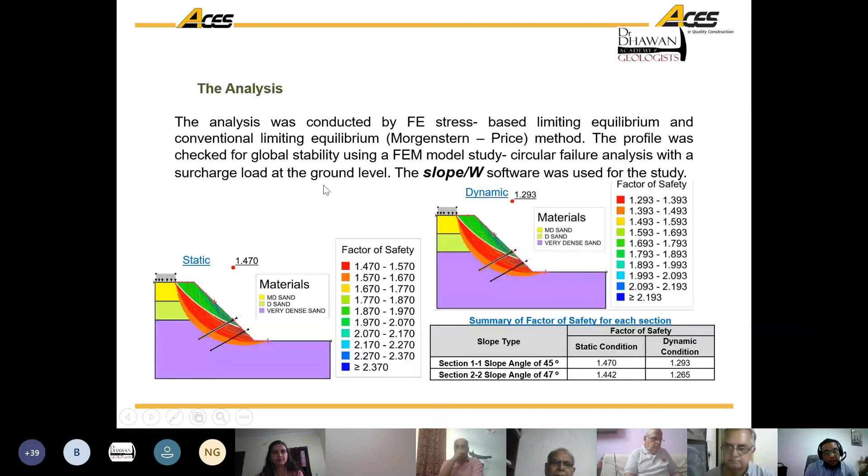Based on the analysis, we recommend the support measure required, either wire mesh, geogrid, geotextile, rock bolts, or soil nails in this case. We use the SlopeW software to support the recommendations. This is a 3D, 2D analysis we do with XSTABL also using the software.

Thank you so much for your patient hearing.